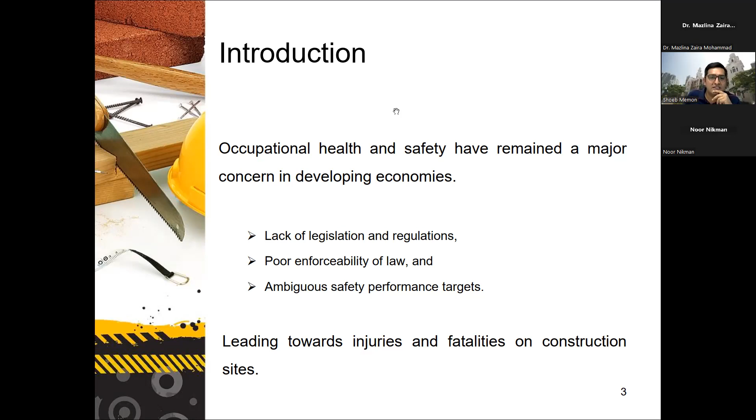What this leads to is injuries and fatalities on construction sites. I can name so many newspapers now in Hong Kong. From the last couple of years, we have seen an increase in construction injuries and fatalities, a major increase. This number is actually from the Housing Authority of Hong Kong, and it provides a generic overview of the construction industry.

You can see from 2012 to 2022, in the last 10 years, the number of accidents per 1,000 workers in the construction industry is going down from 44.3 to 29.1. Fair enough, should be a good sign, right? It should be a good sign that it's decreasing and the number is going down consistently. This number, the red lines and green lines, shows the housing authority works.

The housing authority works is more of public housing in Hong Kong. The housing authority is responsible for public housing, and there's major construction work going on around housing authority projects - maintenance works as well as new projects. That's why they have compared, and this figure is from them, comparing with the overall construction industry.

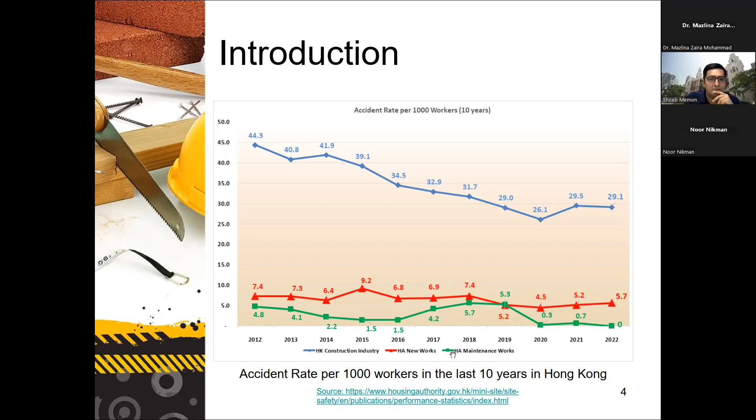Generally, they are doing fine, perfect - they are doing well compared with other contractors or other participants in the industry. But in general, things are not good. Still, we see construction-related fatalities are among the highest compared to other industries.

Construction-related fatalities are among the top, if you look at the occupational safety and health numbers in other industries. This is actually a reference to a LegCo paper, a Legislative Council paper, which presented the numbers showing how poorly the construction industry is performing in terms of safety.

We can see similar numbers in other developing economies. If you compare with Malaysia, Pakistan, India, or any other developing economy, we'll find similar numbers.

This was actually reported in newspapers as well, like in Hong Kong Free Press. It was reported that in 2022 alone, 13 deaths occurred related to construction.

There have been many cases. There was a major tower crane accident in construction, where 3 people died and more than 6 people were injured on the construction site. There were many other accidents on construction sites where people died.

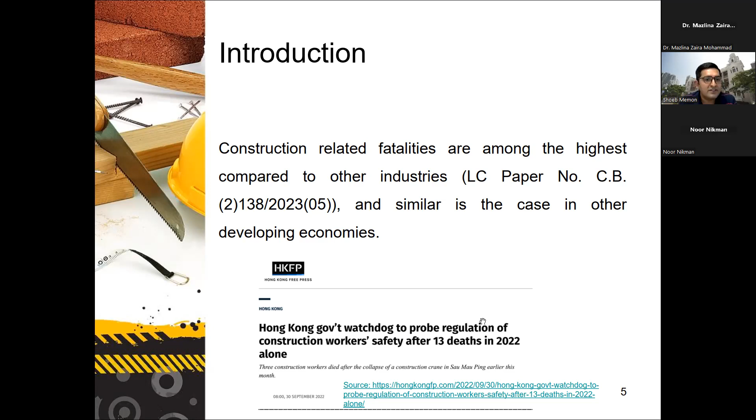This number of 13 is actually reported from 2022, and it's becoming common nowadays in the construction industry, especially in Hong Kong. We hear a lot of news about accidents on construction sites. I don't know what's the reason. They are still looking into these things, what are the reasons for this increasing number of accidents.

So what should we do? Should we just sit down and forget about everything, or should we focus on the root cause? A lot of people believe, and research suggests, that workers' unsafe behavior is actually a root cause of construction injuries and fatalities.

Unsafe behavior of construction workers - why are we blaming construction workers for this? They are being affected, and again we are blaming those who are actually doing the work, saying that's your problem, your unsafe behavior.

So we started from here, and a lot of research actually focused on physiological conditions such as fatigue and stress during construction work, individual qualities such as communication - whether they are able to communicate with others about safety issues or not, whether they can learn well or not - and competence issues.

We have been discussing and researching these issues. One of the important issues we have been working on recently is worker engagement. The way we define and explain worker engagement is the engagement of the on-ground worker, who is actually on site, with their immediate supervisors and the management.

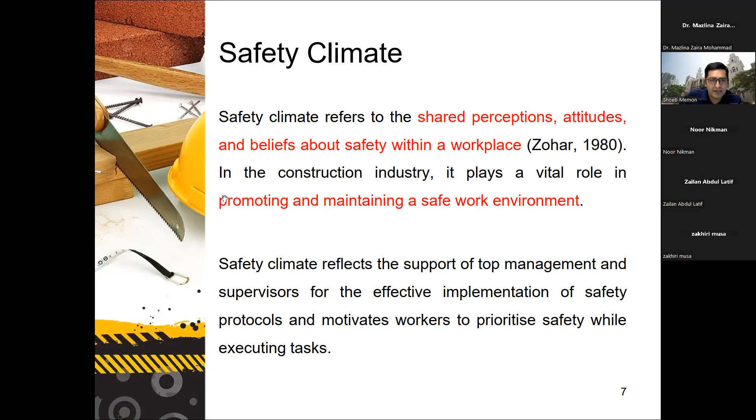Now, this prioritization helps workers manage psychological and physical challenges while dealing with safety hazards. Obviously, when they're not under pressure to finish the job or get the job done, they can focus on work with a different mindset: we have to work safely, no matter if we are delayed for 1 minute, 2 minutes, 1 hour, or 1 day. Doesn't matter, but we have to work safely.

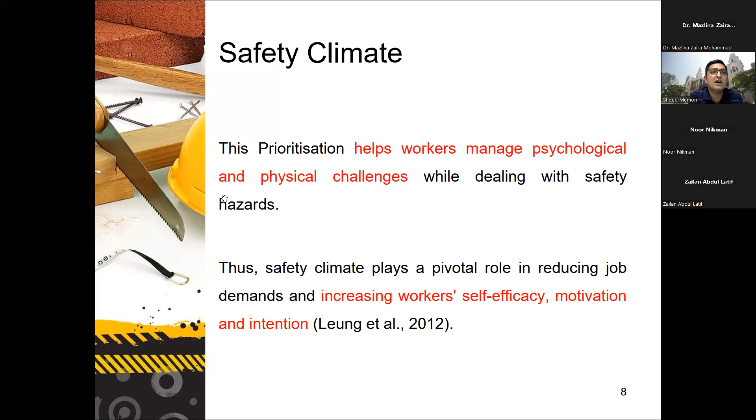So that kind of attitude we are looking for in terms of safety. The safety climate plays a pivotal role in reducing job demands and increasing workers' self-efficacy, motivation, and intention. So if we do not put too much pressure on construction workers to get the job done no matter what, they'll be mindful and careful when performing their work, and they will care about each and every single person working together with them. That's how we develop a safety climate on the construction site.

Now, this is actually an old figure, but I really like this one. I'm really inspired by this one, and it tells us how things work in terms of safety climate, how safety climate works, and how it influences behavior.

This research is actually from a hospital context, not related to construction. Safety climate, by the way, is not only used in construction, but in several other industries, and it's been used for probably the last four decades. So it's not a new term. It's very much common in hospital settings as well, for a safe work environment when we are in an operation theater or any other environment, in a hospital environment, right?

So it suggests that safety climate influences the adoption of safety behaviors.

Just give me a second, guys. I think there is some problem. Dr. Mimi, can you hear me properly? Yes, Doctor. Okay, fair enough. Because I was getting some kind of noise, so that's why I thought something was wrong. Okay, no worries. Let's continue with that.

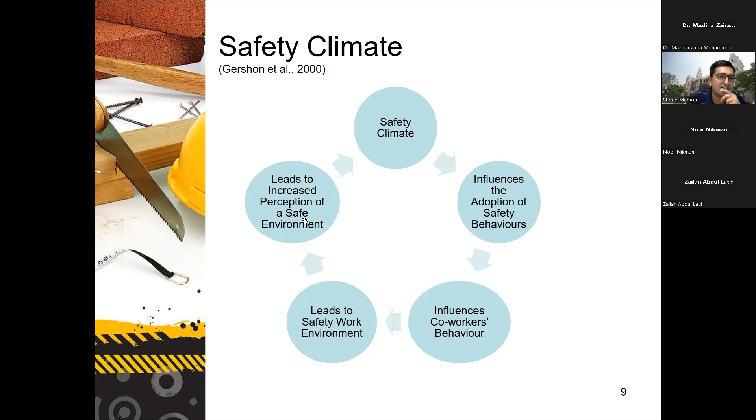So again, this is a very old figure, a framework from hospital context, but it's very much relevant in the construction industry, and it's still relevant actually. Now, we are coming back to Zohar's work on safety climate.

Probably the most celebrated author on safety climate in organizational and group settings. If I receive a paper for review from any journal on construction safety, and they haven't cited Zohar's work, I would probably think they haven't completed the research. He is one of the founding individuals or researchers who contributed greatly to safety climate research.

So what it suggests is that organizational safety climate influences group safety climate, and then it influences behaviors. What do we mean by organizational safety climate?

And what is a group safety climate, by the way? We just mentioned the safety climate, right? And why safety climate and safety behavior? What are these things actually?

Organization safety climate refers to our organizational approach to deal with safety related issues. When we are talking about a group safety climate, we're talking about individual teams.

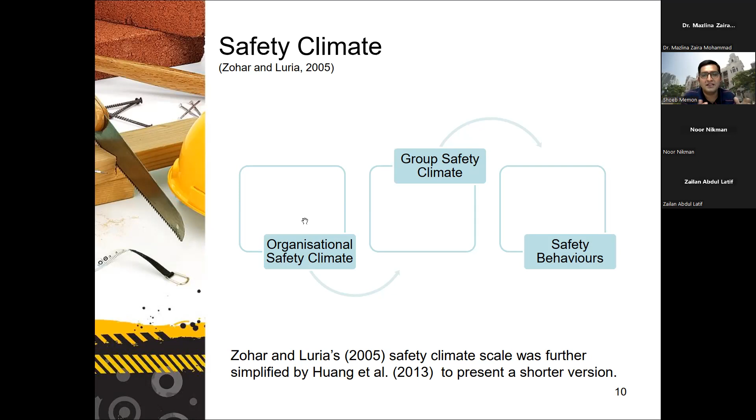So Zohar's safety climate scale is generally used, the construct or scale used for safety climate measurement in research, which is actually further simplified with a shorter version as well. So it helps us measure safety climate in a group or organizational setting.

Now, coming back to our research, this has been led by Dr. Hassan Ashraf, and this paper is accepted by Engineering, Construction, and Architectural Management. I think it's under typesetting, so it'll be available online soon. We completed this work a bit earlier, but it was in a publication process, so it took some time.

This framework suggests that safety climate influences safety behavior through the articulation of safety knowledge and systematic problem solving. What is safety knowledge articulation, what is systematic problem solving, and what is safety behavior here? Let's say the safety behavior is the same, participation and compliance. But what is safety knowledge articulation here?

The safety knowledge articulation is, in lay terms, organizational routines and practices which are conducive to externalizing tacit knowledge sharing through collective efforts.

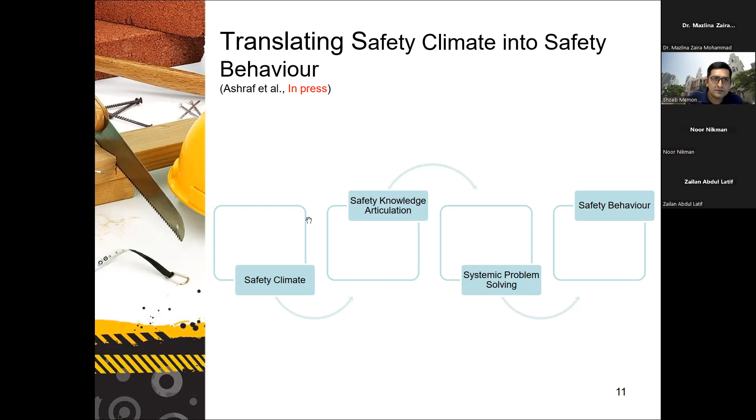Now, in a recent study of safety climate, Syed Yahya reviewed 162 papers from 16 different industries on safety climate studies, and they concluded that safety climate is highly related to safety performance or safety behavior.

Yes, we know that. It is related, but the relationship may not be that strong if we're talking about a direct relationship.

Safety climate is also known to ensure a safe work environment. We discussed this in very old research from 2000 in a hospital context, that safety climate ultimately ensures a safe work environment on a construction site or in a hospital setting.

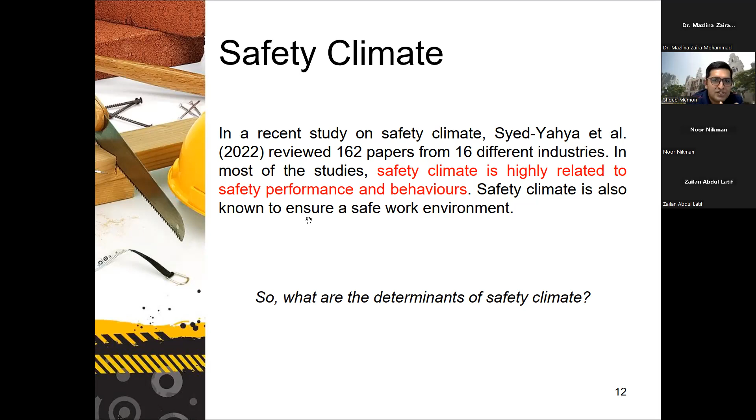So what are the determinants of safety climate? How can we explain it in concrete terms? We said there is management support and commitment, supervisor support and commitment to motivate others, blah blah blah. Yes, we said that. But what are the exact components of safety climate? How can we measure it and understand it?

So we have a first dimension of construction safety climate from Wu's research from 2015, which focuses on safety priority - safety being a priority for a construction organization or contractor organization.

So don't we prioritize safety? The question is, if they say this is important, that means we are not prioritizing safety right now. What are we doing?

Safety supervision - don't we do supervision on construction sites? Don't we provide safety training to construction workers? Don't we communicate with them about safety? What are they saying - safety rules and procedures, safety involvement. Don't we do these things? We do it, right, on construction sites. Yes, we do these things.

But the level of implementation of these things, the level of priority we keep on safety, may not be that high. I'm giving a simple example here - as a contractor or subcontractor working on a construction project, if they have a choice between finishing the job on time and working safely, I'm 100% sure they'll prioritize finishing the job on time.

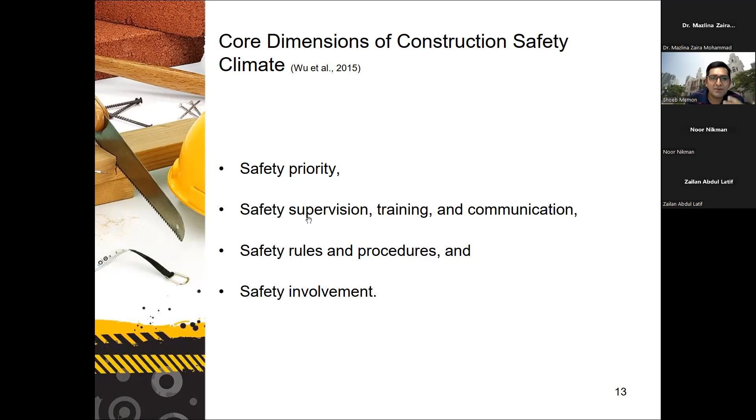We have another work from Zahoor - I'm a co-author on this paper on safety climate in building projects in Hong Kong, completed around 2016-2017. He identified management commitment and employee involvement, again similar things - safety enforcement and promotion, safety rules and safe work practices, safety consciousness and responsibility. So why do we have the same or similar things coming up again and again about safety?

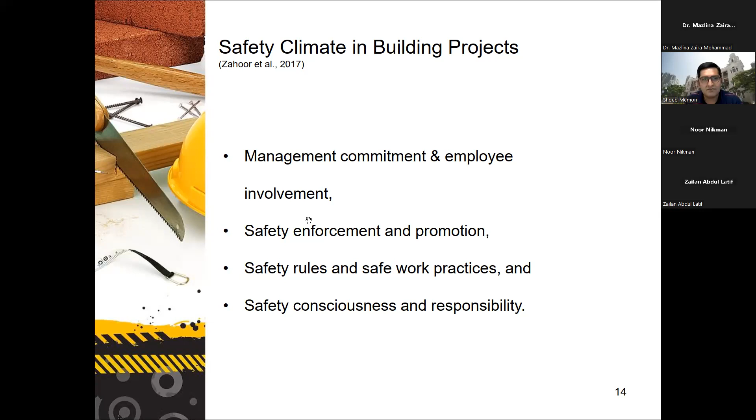Safety climate in construction from New South Wales government, Australia - safety priority, don't we prioritize safety on construction sites? Organizational safety learning, don't we provide training to staff? In Hong Kong, if you're working on a construction site, you're not allowed until you've completed a certain level of training, even as a visitor.

So when we usually visit a construction site for data collection or interviewing people for our research, we have completed a certain level of training, green card training, in order to enter and visit the site. So different levels of training are provided to people on a construction site at different levels. Again, supervisor safety practices and co-worker safety practices as well - these are some of the things we focus on in safety climate.

Now, the Construction Industry Safety Climate Index - this index is developed to measure safety climate of a contractor organization, which again focuses on similar things. I don't think we should repeat these. There's commitment and concern for organizational health and safety by organization management, resources for safety and effectiveness, personal involvement, safe working attitude, workmates' influence, and so on. So these are the generic things we have to be mindful of.

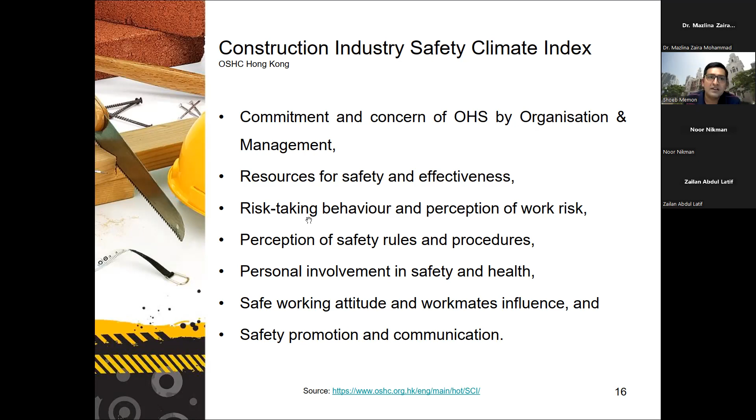Again, I'm not contradicting the policy implementation. Actually, there is a policy, policies are being implemented, but the level at which the policy is being implemented is different on construction sites. So although we have literature which suggests several conceptualizations of safety climate, construction businesses actually develop their tailor-made safety management system to address organizational needs, based on their focus, their priority, their safety priority, how they think about safety, whether it is important or not.

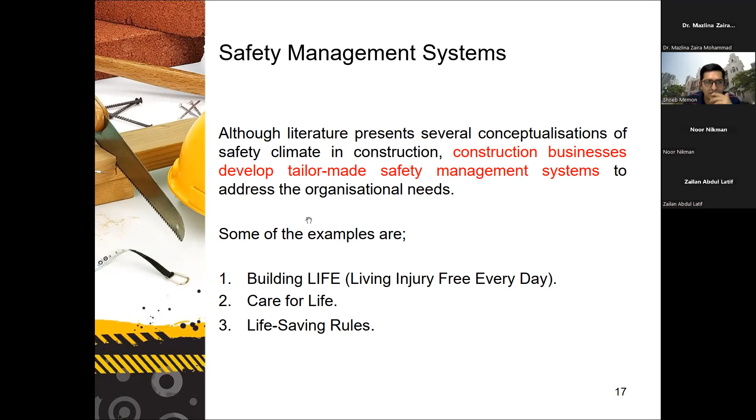Some focus on safety as 'Building LIFE,' living injury-free every day, which is a philosophy related to safety, care for life, and life-saving rules, and so on. There are several examples. They develop their tailor-made safety management system to address the needs of the organization. And they do it actually. We have seen several examples in our consulting work.

So some of the best practices they adopt: there is leadership commitment. They appoint safety ambassadors on construction sites. These are people actually working on the construction site - they are general foremen, safety officers, engineers, managers on a construction site. They act as ambassadors at different levels of the construction site to motivate and nurture juniors with regards to safety. They provide safety trainings, which is very common.

They have safety stand-downs, discussions about safety on a day-to-day basis, safety huddles, which is very common in Hong Kong right now. Safety huddles, stand-downs, and pre-task planning for every single task - they plan about safety as well. Near-miss reporting, I think that is very common, near-miss reporting and incident investigation as well. So they follow different approaches in terms of dealing with safety practices and implementation of their safety management plans or systems.

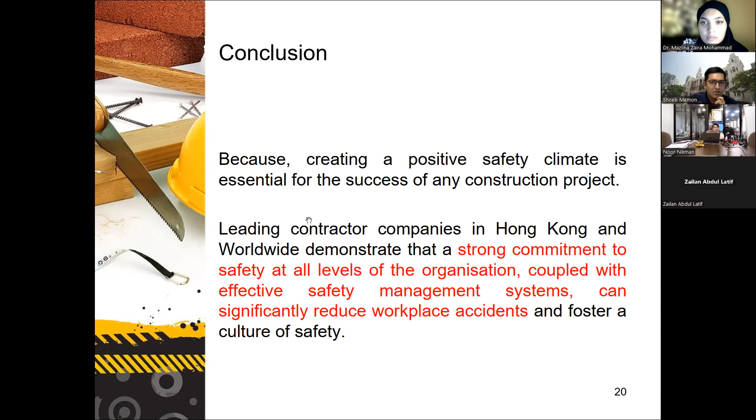So if you have a strong commitment towards safety at all levels, that can help us actually reduce incidents, injuries, and accidents or fatalities on construction sites. I think that's all a very brief introduction from my side.

Any question, concern, anything, just let me know. I'll be happy to answer. Thank you so much.

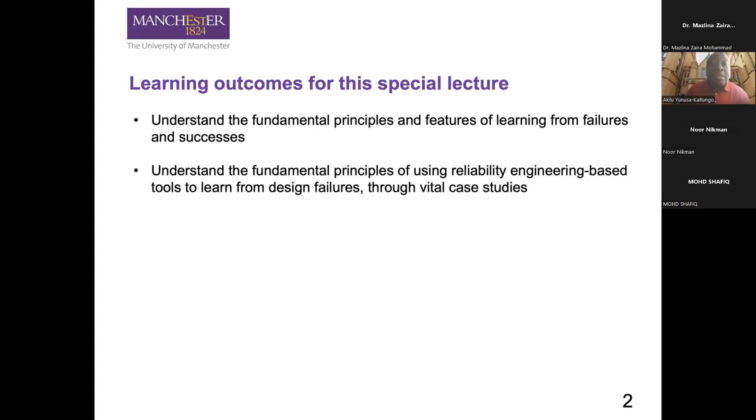The second learning outcome would be to understand the fundamental principles of using reliability engineering-based tools to learn from design failures through vital case studies. I've put in two case studies here: one is the Hurricane Katrina disaster, and the other is the Grenfell Tower disaster in London a few years ago, in 2017 if I remember correctly. About 70 to 74 people lost their lives there. Hurricane Katrina had a far more devastating effect, as some of you would recall from that incident.

So before we delve into the actual lecture for today, I want you to look at these questions. Do not bother about the rightness or wrongness of your answer, just give it a go, and we will definitely revise what I consider my solutions at the end of the lecture.

So let's pick the first question. I've called it brain teaser. I don't want you to tell me your answers now, just note down what you feel your answers are. For each question on your piece of paper or on your device, for question 1, write if the answer is A or B, or C, or whatever you think is the right answer, and do that for 1 to 8.

Note, some questions have more than one answer. I'll give you the next minute to do that, and then we shall proceed into our lecture. I know perhaps some of you are familiar with some of these tools and have some of the fundamental knowledge. For C, Ishikawa is also known as fishbone diagram, so some people might be used to one term, some to the other, some to both. We've got one minute, just note down your answers, and we shall review these at the end of the lecture.

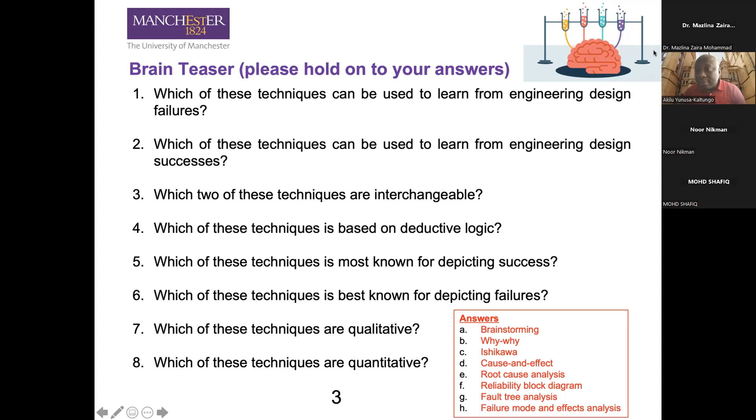So just a brief introduction to learning from safety experiences. We do know accidents are very unpleasant occurrences because of the incredibly expensive damage associated with them to both human lives and property, which further emphasizes the need to investigate every incident that occurs either within our organizations or other organizations, through reports or personal experiences. Detailed and effective accident investigations can offer a means of proactively discovering what could go wrong.

What we don't want is humans being reactive by nature. This is why sometimes, even when you're given up to a year or six months before exams, you still find yourself circling back to your revision a week or two before the exam. Just because of our reactive nature, some of us feel our output and productivity is highest when our deadline is very close. Now, with regards to safety, we cannot or should not take such approaches because of the potential costs associated with these in terms of life. You should remember it's almost impossible to place a price on life, no matter how young or old whoever it involves is. So all facets of engineering and management need to develop a strong capability to systematically delve deep into root causes of accidents.

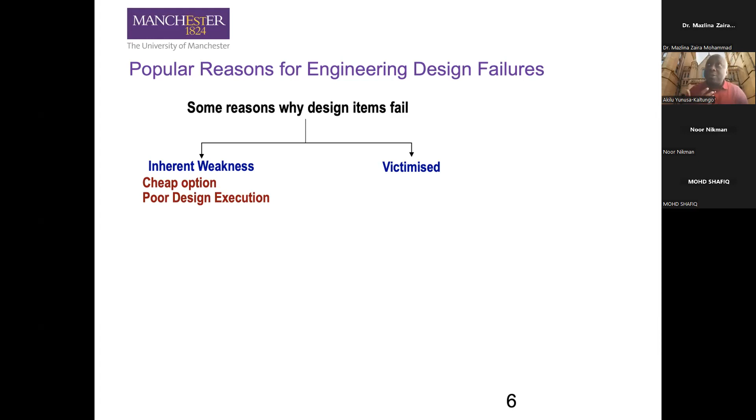Inherent weaknesses: are you going for the cheap option because you want to cut cost? We see this a lot, people go for the cheaper option and compromise quality. Poor design execution: so the option might be correct, but if it's not adequately designed, the raw materials and everything might be the right ones and in the right proportion, but if the execution of the design is poor, you'd still have a poor outcome. Also, substandard material.

This is self-explanatory: the manufacturing process. Are you manufacturing to the right tolerances, or are you using the right fits, and so on and so forth?

Now let's look at victimization. Victimization has two further categories, which could be functional—during functioning—or physical. So let's look at some of these.

Poor installation again could be a result of victimization. Poor commissioning—so you've installed the equipment, you've got the right equipment made with the right material, installed correctly, but then commissioning. We all know commissioning.

I used to be a commissioning engineer when I was in projects. Commissioning, depending on the size, cost, and criticality of the assets, can take months or even up to a year. What you do during commissioning is apply steady load and observe the reaction of that structure or asset to each of those loads or service conditions.

So you're meant to be going gradually—maybe you start with 5% load, run it for an hour, run it for 2 hours. A lot of commissioning engineers sometimes become impatient and decide to speed up the process, especially when you're dealing with things like concrete.

So I worked in the cement industry. We have what we call early strength, 28-day strength, and then long-term strength, which could take up to 365 days to form.

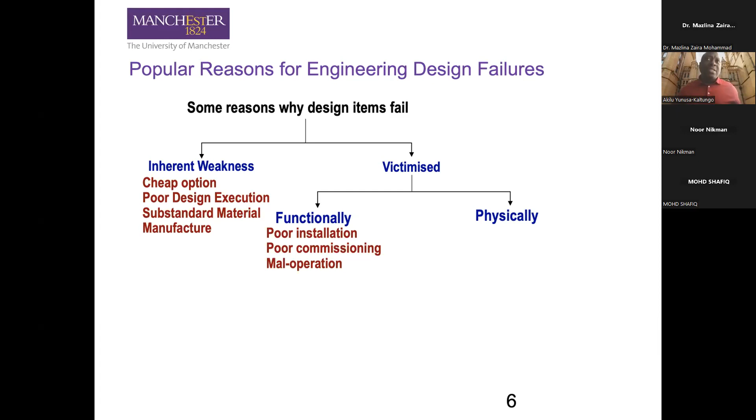Then you have change of intent. Change of intent refers to using a particular asset or infrastructure for another purpose other than what it was actually made for. So sometimes you have things like bearings and couplings which are supposed to be used in specific ways.

Maybe, for example, you have flange couplings which are supposed to be tightened to a certain tolerance limit, but because you want to attach something else to them, you use another limit, or you use a wrong bearing because you've run out of a particular type.

So all of these things affect the structural integrity of our assets. Then you have modification—you change things, you modify.

This happens very well even in our homes. Sometimes you want to modify your homes and break certain parts of walls. A very common one is moving from a traditional separated kitchen into an open plan, and you break the partition wall between your dining and kitchen without considering that if that wall is an original load-bearing member, you've automatically compromised the structural integrity.

And not all of us seek the attention of structural engineers before we implement such changes. So all these have to do with changing intent or modification without change management processes.

And then on the physical side, you have deterioration and damage. Deterioration could be a result of the asset staying too long in your supplier's store and not being properly protected.

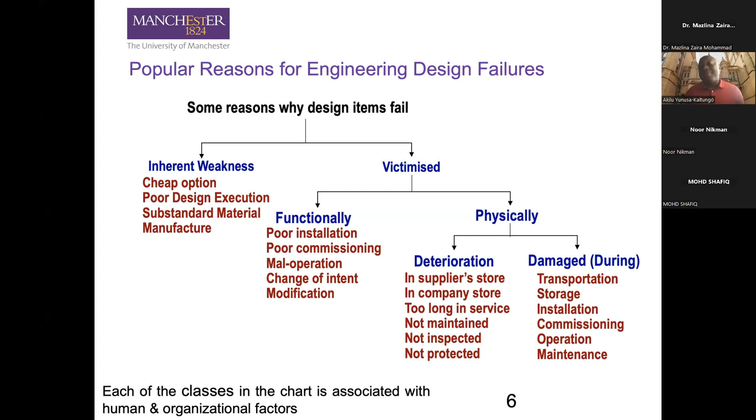Now, how do we solve the problem with people? The easiest answer most of the time is through training. But there are two elements to training: you need to train people, and then give them the opportunity to retain the knowledge they've been given. The only way people retain that knowledge is if, one, the training is adequately and competently delivered, and two, the organization gives them the opportunity to implement the skill they've acquired, or else they'll just hold a certificate but not have practical knowledge, which means every time they do that activity, they're doing it for the first time, and that doesn't really reduce the hazard profile.

So you have things the organization brings: training is provided by the organization, the opportunity to practice is provided by the organization, and the support and guidance is provided by the organization. On the side of the individual, the individual has to have the right attitude. Attitude could be classified as either self-limiting belief, believing you can do something or believing you can't, and the second part is whether you're willing to do it or not. Then aptitude, another factor associated with the person, is whether they are physically or mentally capable.

We need to assess, for example, people on construction sites. On the physical part, you don't want people carrying things that are way too heavy for their weight, because even if they don't drop it to injure someone else, they could injure themselves, strain their backs, develop musculoskeletal problems, and so on. Mentally, people need the right level of understanding of the training you want to put them on, or else you put them in a panic mode. When people are in panic mode, they're unable to function or become very prone to errors. So you want people not in their comfort zone, because there's no challenge or development there, but in the stretch zone, between the comfort zone and the panic zone, where continuous improvement happens.

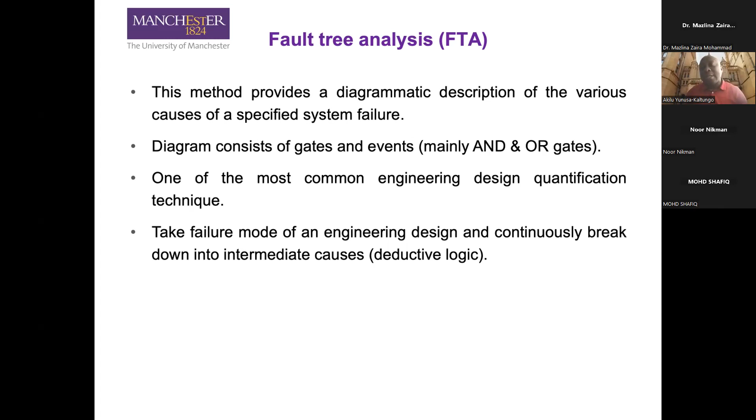If you don't get to the basic event, what you have is symptoms, just like you have in Apollo-type root cause analysis. Now, it's usually used to detect failures, and here are some guidelines, some things to know: no miracles. If the normal functioning of an engineering design propagates a fault sequence, it is assumed that the design functions normally. A good example is the jackhammer, which you use to vibrate and remove water from concrete pores.

That equipment is designed to vibrate — its normal mode of achieving its objective is through vibration. So when designing a fault tree associated with that kind of equipment, you cannot have vibration as a failure mode, because it is designed to vibrate. But if you have another equipment, like your car, and it begins to vibrate, then you know there is a problem. So vibration becomes a failure mode for that scenario — that's what I mean by no miracles.

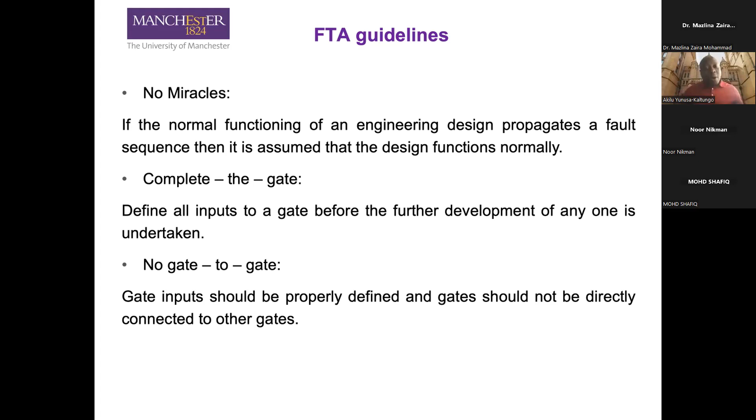You see a physical illustration of this. Then the other tool - fault tree, as said, by default is used for finding the reasons for failure. Reliability block diagrams, on the other hand, are used to determine the reasons for success - what would make a system or a project succeed, okay? And it's similar to the fault tree, and they're in fact interchangeable.

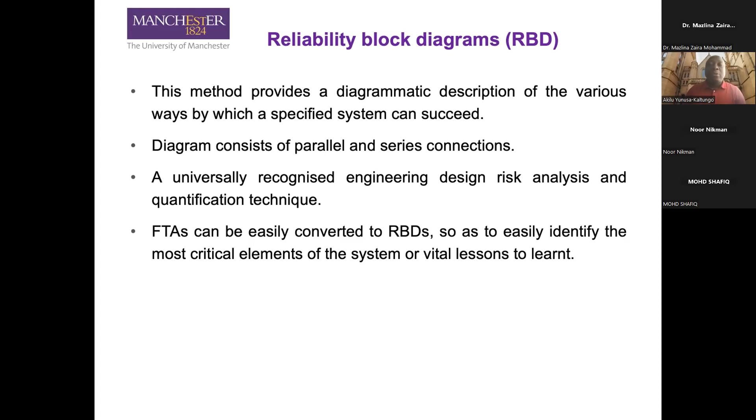So you can convert a fault tree into a reliability block diagram and vice versa. But when you're converting a fault tree into a reliability block diagram, you only use the basic events to construct the reliability block diagram.

In the interest of time, we will not go too deep into this, but I'll show you how we've used this information to investigate the reasons for failure using fault tree and reliability block diagram. I also have several publications on this - if you just go on Google Scholar and type in my name, you'll see a lot of my articles related to this, including fault tree analysis or reliability block diagram.

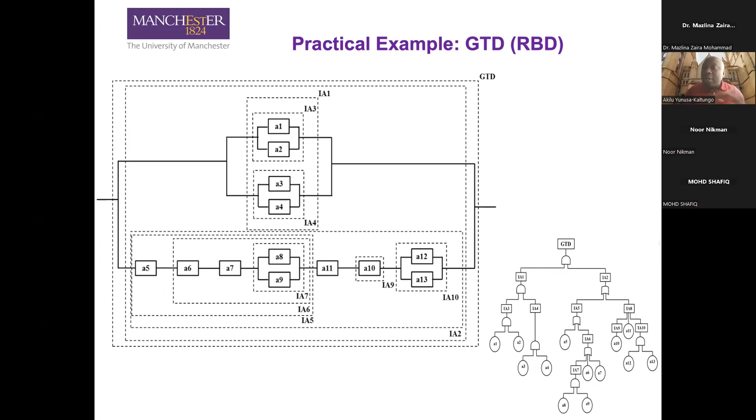It's just like the spare tire in your car. You have 4 tires functioning and a spare in your trunk. If one of those 4 tires fails, you have your spare to replace it. That is resilience, and it's associated with parallel connection. Series connection means if A6 fails, the whole branch fails because it's a series connection, like a chain. If you lose one link in a chain, the whole connection is compromised. I hope that is clear.

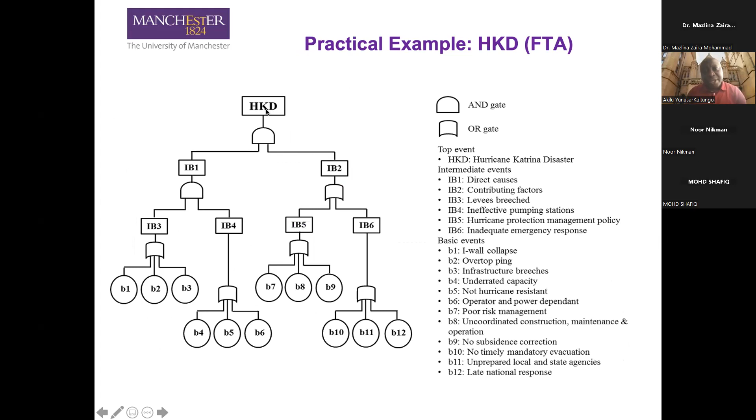Sorry, I'm moving a bit fast, just being conscious of time. This is another example, the Hurricane Katrina disaster, using a similar methodology. This is the fault tree, and this is the associated reliability block diagram. It's exactly the same methodology.

B1, B2, B3 are all in series because of the OR gate, but they are in parallel to B4, B5, B6. B4, B5, B6 are connected in series because of this OR gate, but this whole branch carrying B4, B5, B6 is connected in parallel to the branch carrying B1, B2, B3. That's why you see this whole one in parallel with this.

So IB3 contains B1, B2, B3, and IB4 contains B4, B5, B6. So IB3 and IB4 are in parallel, which is why you have this and this in parallel. I hope that is clear.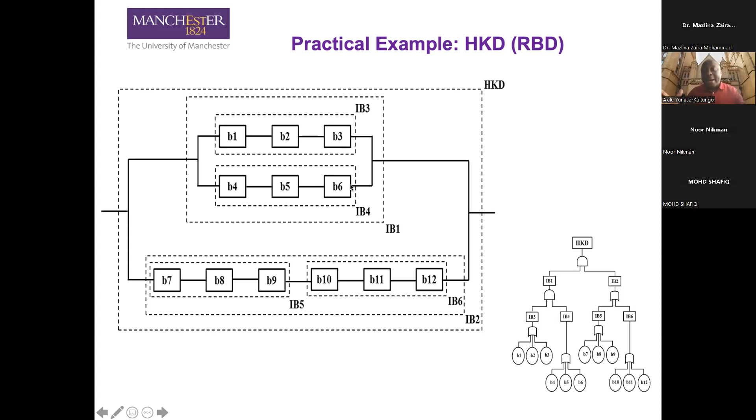Now we've looked at fault tree and reliability block diagrams, and there are other tools as well, like the 5 Whys analysis, the Ishikawa diagram—they're all continuous improvement tools, and they can all fit together depending on how deep you want to go. If it's a very critical error—fault tree, reliability block diagrams, event tree analysis, bow tie analysis—these can get really complex and very mathematical. Sometimes we even use Bayesian network analysis, or machine learning, because of the complexity and the amount of information involved.

But if you're dealing with a simple process or a simple failure, you can use other activities, like 5 Whys analysis, or go through brainstorming. All of these tools can fit together. First you need to map your process and understand where everything lies.

You would definitely need the flow chart or the plant layout diagram. Then you benchmark your process stages to standards and best performance. You can look at best performance within your industry, or if there's none, look at best performance in other industries. For example, if you compare yourself to other construction companies and you're doing better than most, nothing stops you from comparing yourself to the aviation industry, because they have more stringent safety requirements. If you've matched the aviation industry, then you go into nuclear, and so on.

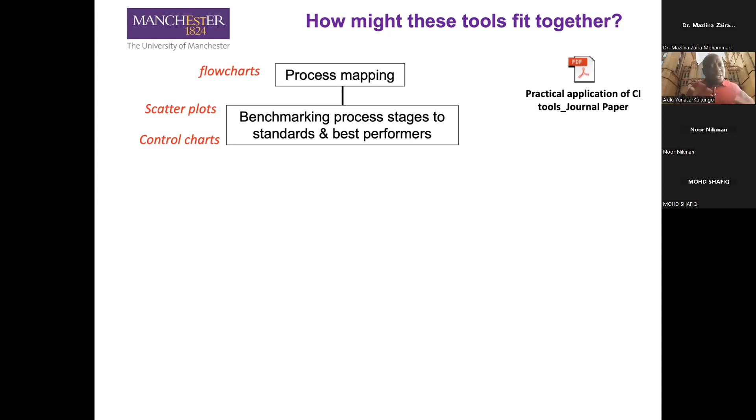This is what we refer to as continuous improvement. You could use scatter plots or control charts to mark your areas of deviation and success, just like in Lean or Six Sigma. Once you start seeing deviations, you begin to brainstorm. You get experts who know the process, put them together, and have everyone give their ideas. You generate those ideas, and they lead you to your failure modes, which you can now use to construct your fault tree or reliability block diagrams.

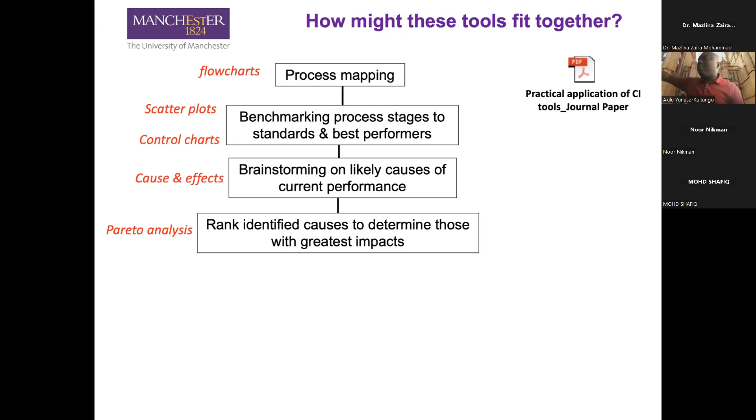Then you would have several failure modes and several faults. Some of them are critical, some of them are not critical. So you can rank them based on severity, probability of occurrence, and so on, using simple tools such as Pareto analysis. Pareto is also referred to as 80-20 analysis, whereby we believe that 80% of our failures are caused by 20% of our assets, and so on.

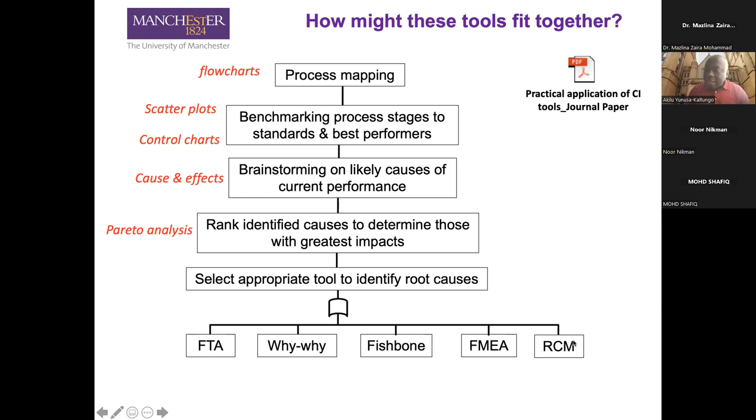Once you've determined the highest ranked failure modes, you focus your attention on those. Then you select the appropriate tool. It could be fault tree analysis, fishbone or Ishikawa, failure mode and effect analysis, reliability centered maintenance, reliability block diagrams - there are so many of them.

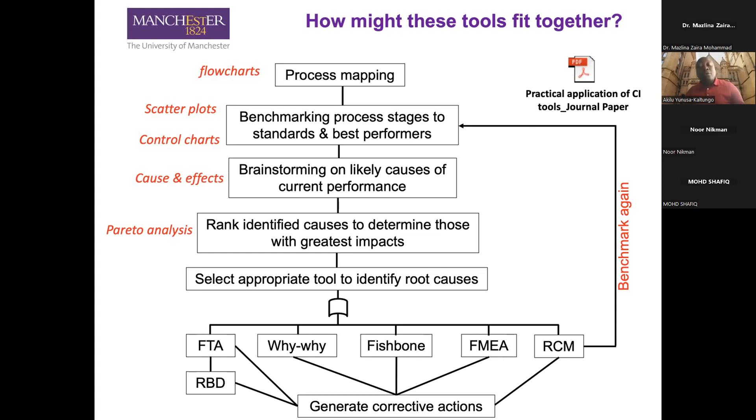And then generate your corrective action, which should again feed back into your benchmarking process for improvement. That process needs to carry on, you need to go on and on and on. I've put a paper there, which I can send the title of the article to Mimi if you want further reading.

So that takes us to what are some of the barriers to learning from experience. One is lack of clear procedures for investigation. Sometimes we just get people together and ask them for their opinion. That structure, or systematic nature, is very crucial if we want to have traceability.

Approaching all investigations in the same way and with the same level of resources is a very bad approach. One, it is not cost effective, and two, it could lead to further failures. You shouldn't invest the same amount of effort into investigating a critical failure as a non-critical failure, which is why prioritizing using things like Pareto analysis is very crucial. Once you've classified them and identified the most critical failure modes, you apportion the appropriate amount of resources. So you don't waste people's time, because when you put too much on people, they become disconnected, and then they begin to cut corners, and you don't get the required resources and outputs you want.

Failure to gather all relevant facts and information prior to the commencement of investigation - some people rush investigations just to tick the box. That's a very wrong approach, which is linked to concluding the investigation too soon. Some people do investigation just to have a paper trail.

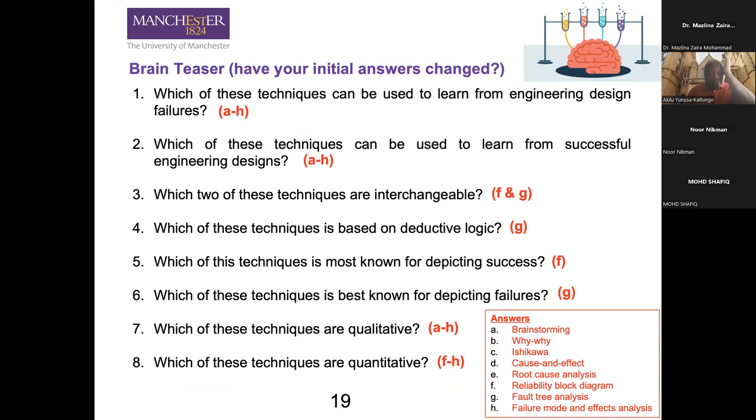Let's go back to our brain teaser. I'll show you what I think the correct answers are, and then you can compare them to what you initially selected. I'll give you 10 or 15 seconds so that we can move on, and I'll wrap up the session.

On the last slide, anyway, you would have this slide, so you can always make reference to this at your own convenience.

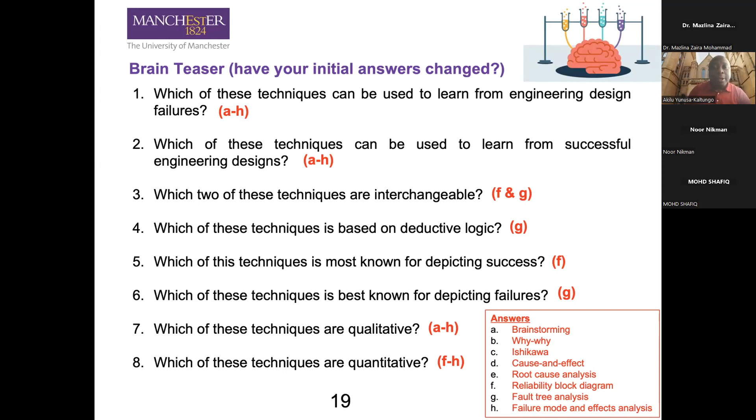On that note, what have we covered during this afternoon's lecture? We've looked at the fundamental principles and features of learning from failures and successes, individual and organizational barriers to learning from the past, and reliability engineering-based tools for learning from the past.

Thank you very much for your time and for listening. I'm sorry I had to rush through the session, it's a very involving topic. Thank you very much, and I'm happy to take a few questions if time permits.

Thank you so much, Doctor. I would like to express my deepest gratitude to you for sharing your invaluable expertise and research with us today. For me, it's a very interesting methodology, which, if I'm not mistaken, I previously read about during my PhD, the FTA method, but when you explain it now it's clearer, because reading it in journals or theses it's quite difficult to understand how they apply that method. This is really helpful for future research or journal write-ups later on.

So without further ado, is there any question from the floor? You can open up the question, please. Everyone, is there any question? I think there's a hand. Yeah, Zachary, Zahiri, Mr. Zahiri.